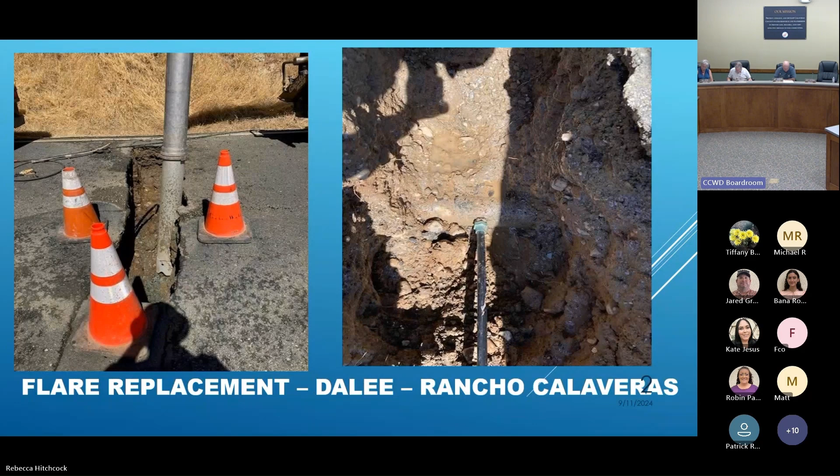So here we are with the flare replacement on Dalee. These come up when the service lines are replaced, oftentimes it's the result of the failing flare on the water main. In the image on the right you can see the water main is partially exposed with the flare connected, and the great work the utility crew is doing, you can see the service pulled out of the ground with multiple repair clamps on it.

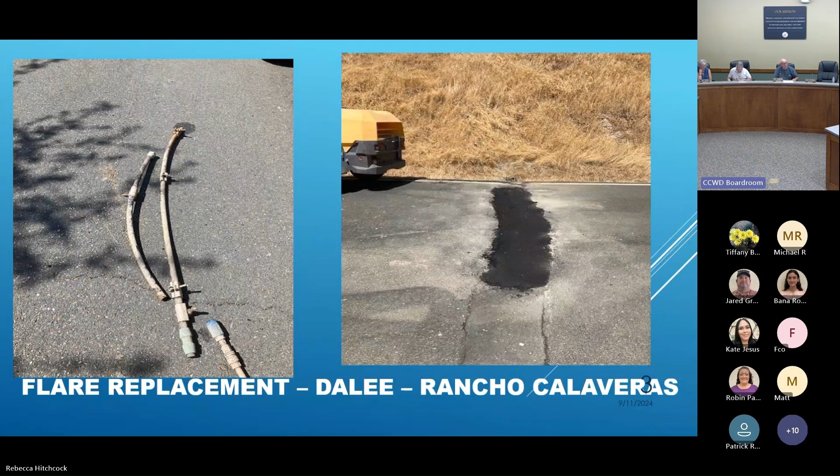With 37 service lines over the last year, we're still in the noise phase of kind of what are we looking at in terms of failure. We have just too many right now, and so we need to get ahead of that. That's part of the good work our utility crew does.

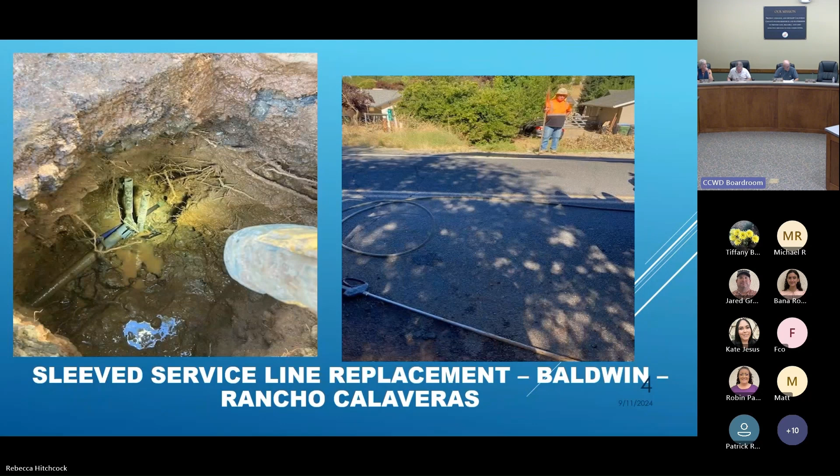This was an interesting one: service line on Baldwin that was sleeved in a piece of plastic that developed a leak. So our folks replaced the entire service line, and you can see it sitting in the conduit there in the image on the right and the left.

What's really interesting is the poly developed this blistering, and we think it could be from the heat sitting inside that piece of conduit and getting hot. Our guys out in the field have never seen it before, it's a really interesting one. That particular material it's made out of, do we have a lot of that out in the field?

Yes, we have a ton of it. Most of the service lines in this service area, actually all of our service areas, are made out of polyethylene. We've seen it flake off, almost like if you can imagine a corn flake coming off the poly, but not bubbling like that. At least these folks have not seen that.

Is that something that could cause a break? I would definitely think it would have an impact on the integrity of the service line over time. I have a piece of it in my office, actually I was going to bring it but I forgot.

So you can see the inside of the line, and it doesn't look like that? It's not that. So I would say over time, I'm sure, but in this case it wasn't the result of this. How long had this one been in the ground? I mean judging, I would say for quite some time, perhaps 20 years, but that's just a guess at this point.

Could it have been damaged like that in the beginning and then they sleeved it because it was damaged? Good point, could happen. Could happen.

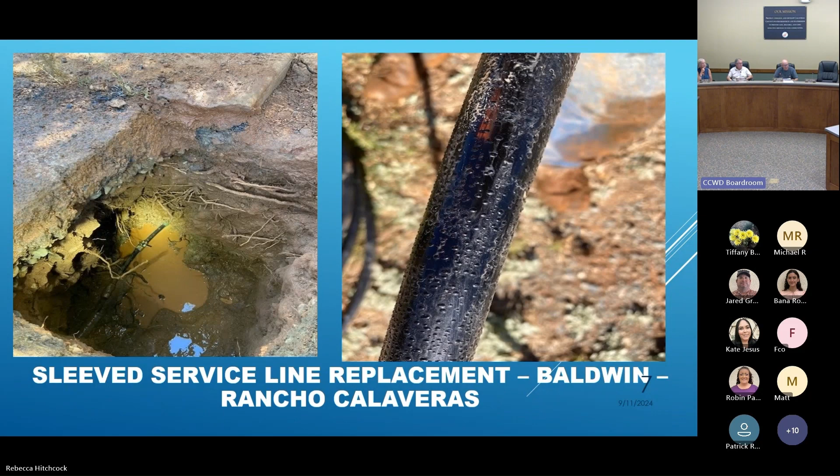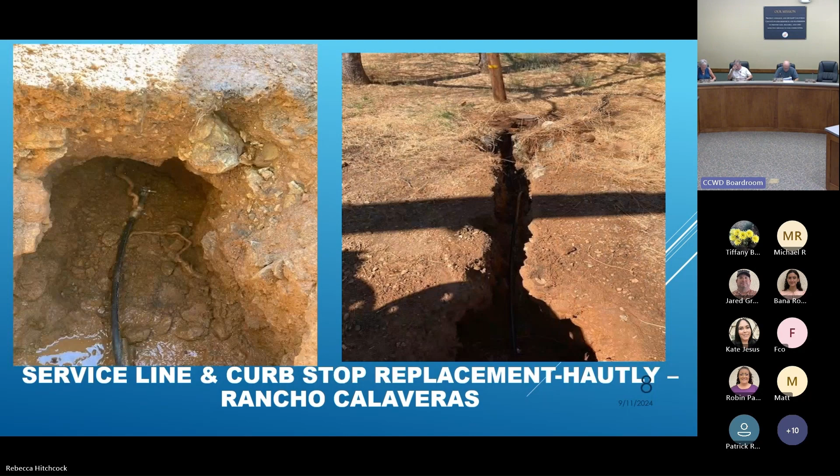So, more of the same: service line and curb stop replacement along Hautly. Can't say enough great things about the work our folks do.

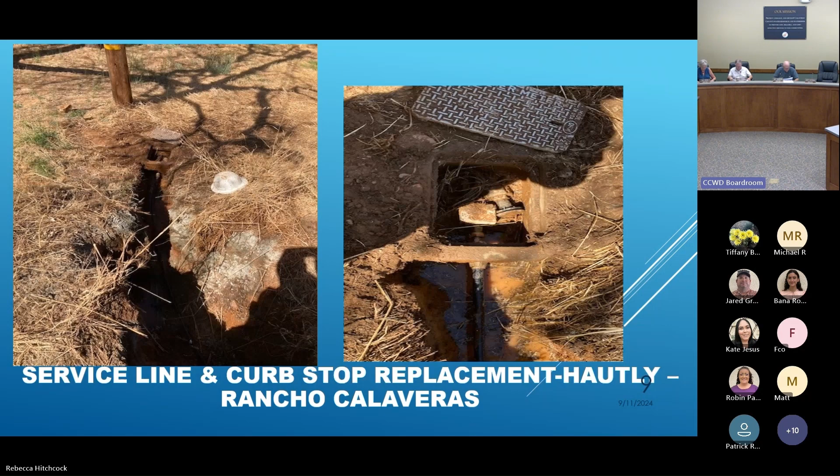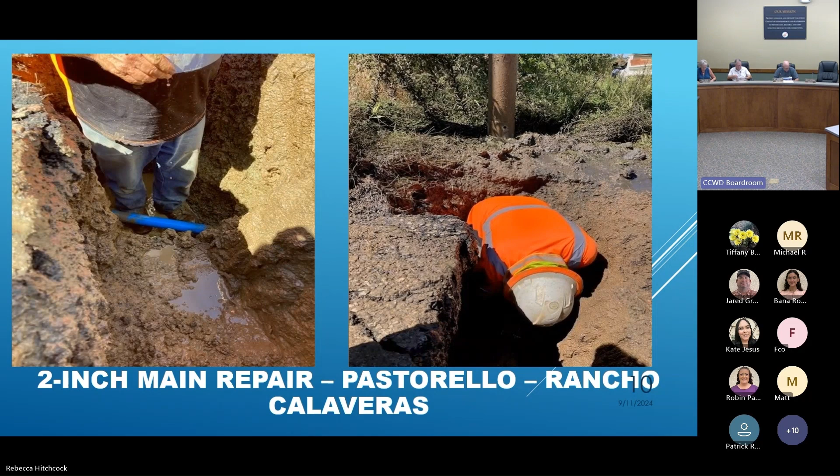2-inch main repair on Pastorello. This is the infamous Bluebell that our folks got in there and repaired during the month of August. You can see the full circle repair clamp on that 2-inch.

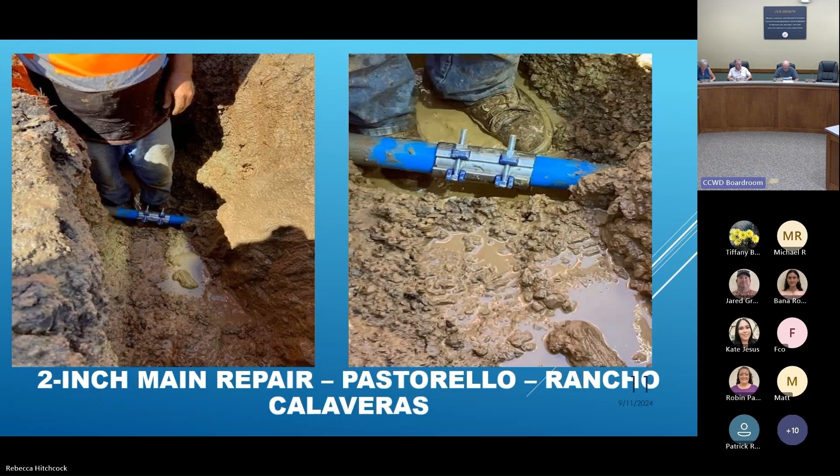Hydrant repair. So we had conversations last month with the fire protection groups. We did an after action review of the Arrow Fire, and talked about how the district works with local fire departments to ensure the integrity of fire hydrants. This is more of that conversation along Hogan Dam Parkway.

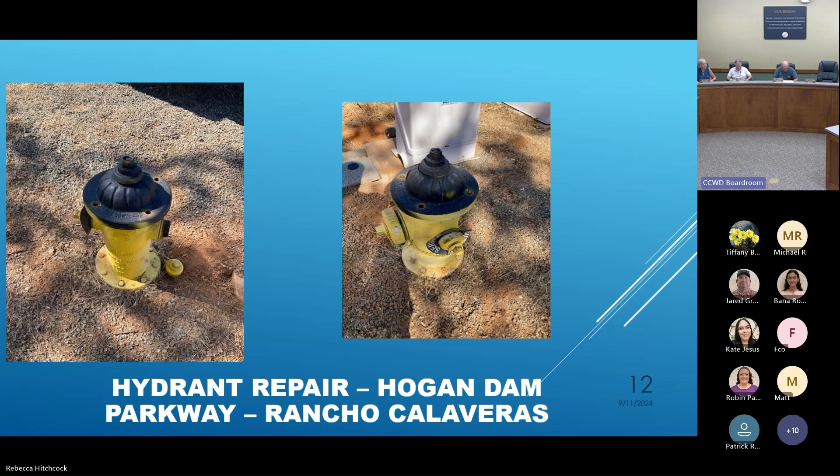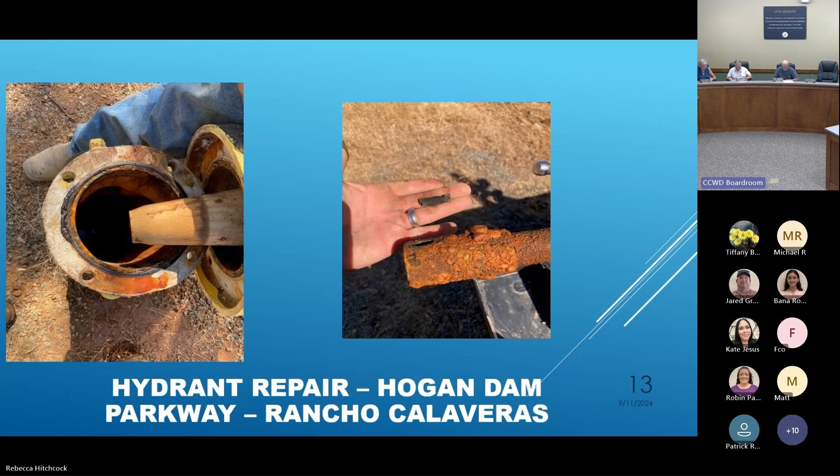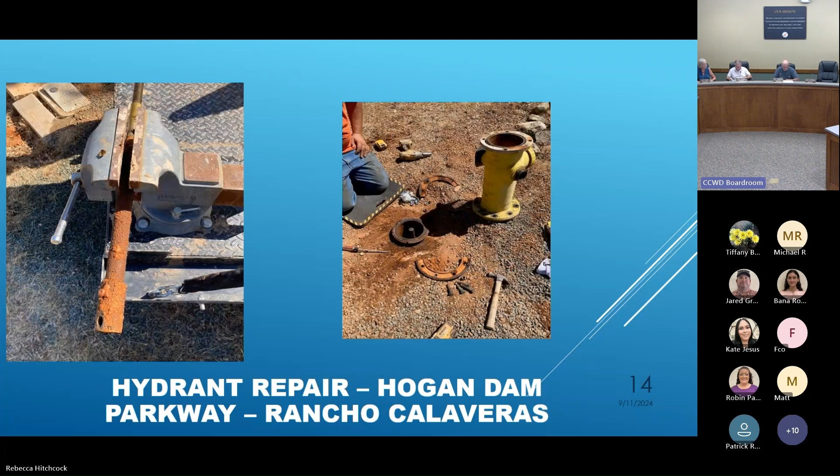We have a stretch of distribution system and this fire hydrant was out of service. Walking through the stem with the bolt at the base, you can see it had just broken off in the image on the right. So our folks go in and take repair components and replace the failed components and rebuild the fire hydrant. You can see the cleaning of the stem in the image on the left, getting off the corrosion, and on the right, the breakaway flange being replaced, the body of the hydrant being put back after everything is cleaned and the breakable parts are rehabilitated.

Can't say enough great things about the work our folks do.

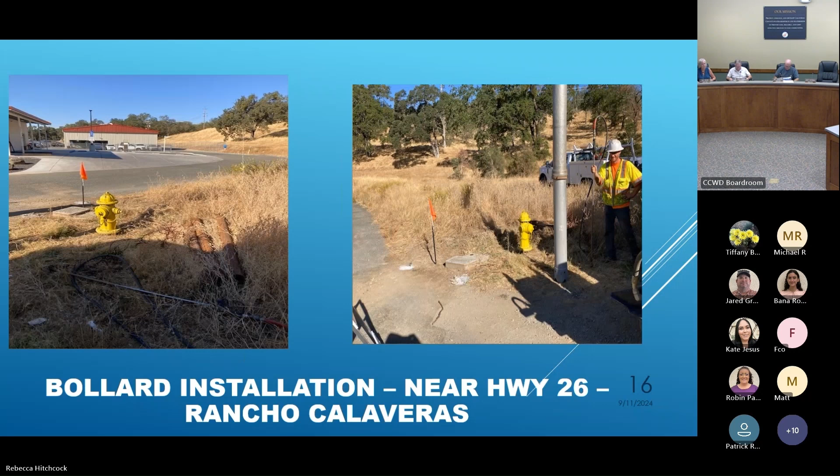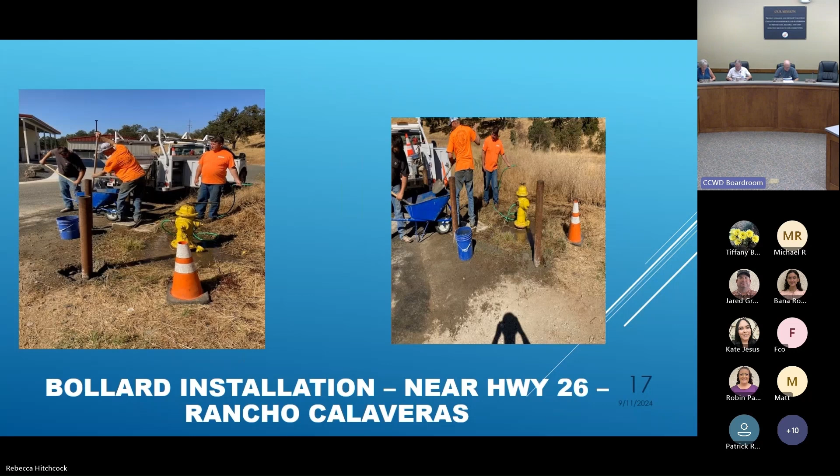This is an interesting one. We have some meter boxes that are just continually getting damaged from vehicle traffic. So sometimes we'll install bollards to protect the meters, and that's what we did here. The distribution team poured steel pipe filled with concrete in front of, in this case, a fire hydrant, and then painted them safety yellow to keep our infrastructure, and actually there's a meter, protected.

There were simply so many service line leaks, and the water would travel from those leaks into this area along Dunn Road. So anytime we would expose this main and try to find where this water main leak was, we would just have water coming in from all directions and really unrecognizable. So there was no ability to really define where the leak was coming from.

The utility crew last year replaced all the service lines along Dunn Road, and the county addressed some stormwater along Dunn Road, and we still had water. So in August, the construction crew worked with the distribution crew, and Pat Burkhart, our construction maintenance manager, was actually out in the ditch working with the guys. They found this leak that has been leaking for approximately 15 to 18 years.

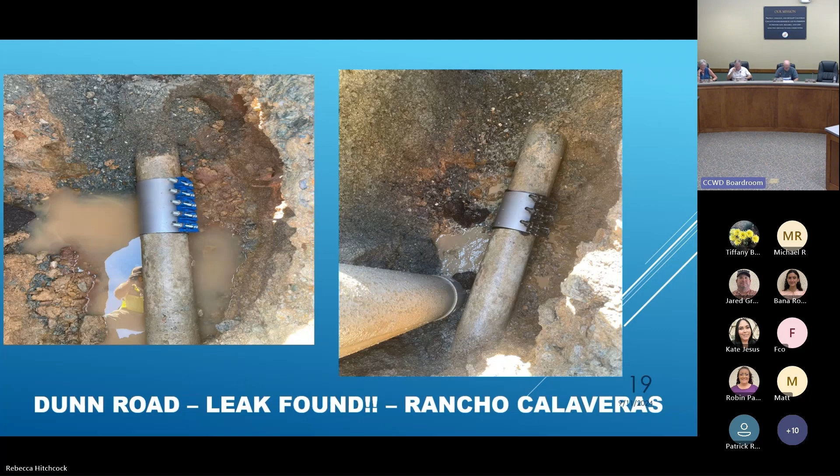And that's this one, see this picture. So it's been repaired. In the image on the right, the black rubber beneath the full circle repair clamp is simply just blown out. So there was a repair at some point in time, and that rubber had just blown out over time, and it was weeping and causing a leak. Hats off to the guys for finding that and fixing it. That one's a good one.

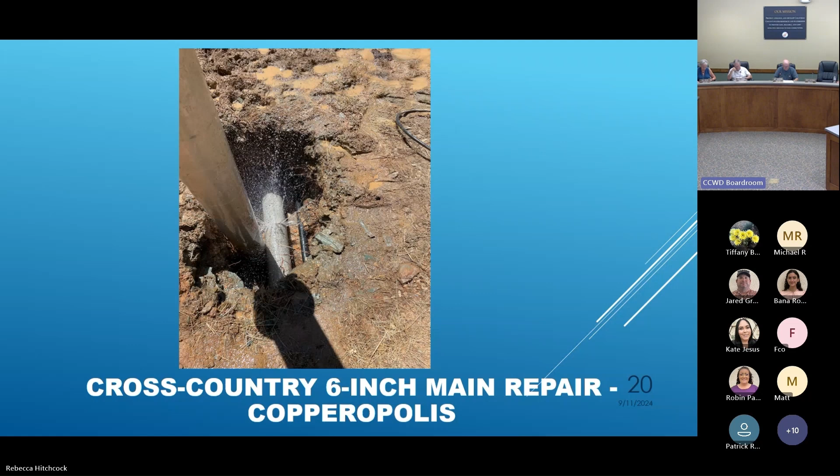Here's one in copper. So AC mains, oftentimes in the dry weather, do what's called shear breaks. The main will just literally break in a perfect circle or ring around the main, and that's what we have here. Those are repaired with a full circle clamp. This is a cross-country line that feeds the Reed's Turnpike pump station, so a really critical line that needed to be repaired after hours. It was ID'd kind of late, and the folks out in the copper distribution crew did a great job getting after it and getting it fixed.

Here's one in West Point. So this is a 2-inch raw line.

Right at the base of the Bummerville Reservoir Dam face, there was a significant amount of water coming out of the dam in front of it, which, as you can imagine, can freak everybody out pretty quickly.

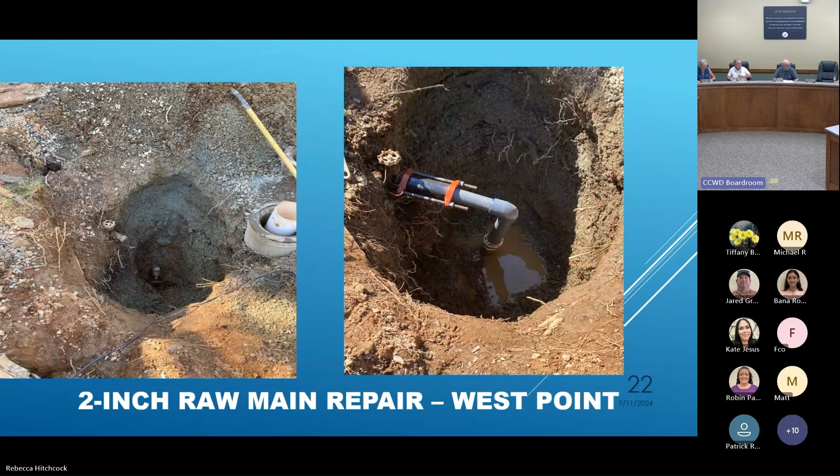Doug did a great job up in West Point diving in and understanding what was actually going on, and it turned out to be a valve. You can see the brass kind of just falling apart in the image on the left. He was able to get in with the operator, Scott Grutzmacher, and they replaced that failed valve and piping, installed a new valve and new piping, and reestablished the G5 lids on the line. Hats off to them for knocking that one out.

If you could go back to the prior slide, there's the 2-inch raw main right there. There's an orange tool there, looks like a jackhammer - is it battery powered? Yeah, looks like a battery powered Sawzall. But is that a little jackhammer, cutting the pipes? Well, it's a little spade. Oh, he had one of those small jackhammers - yeah, a little battery powered jackhammer with a little spade bit on it. That's what it looked like to me.

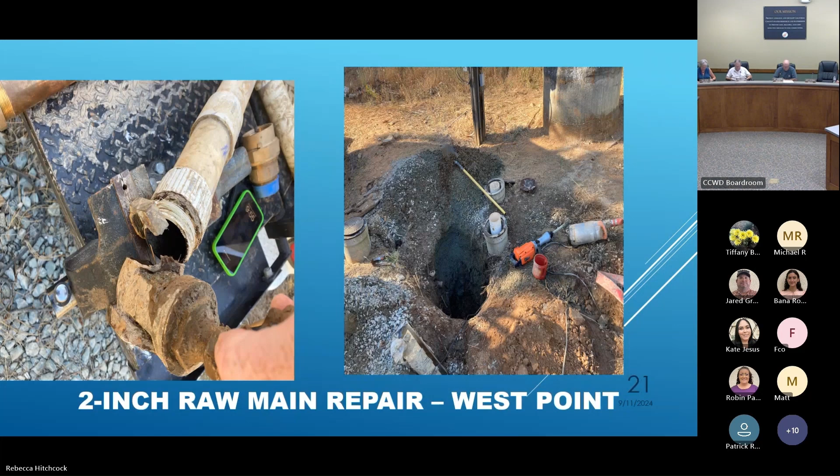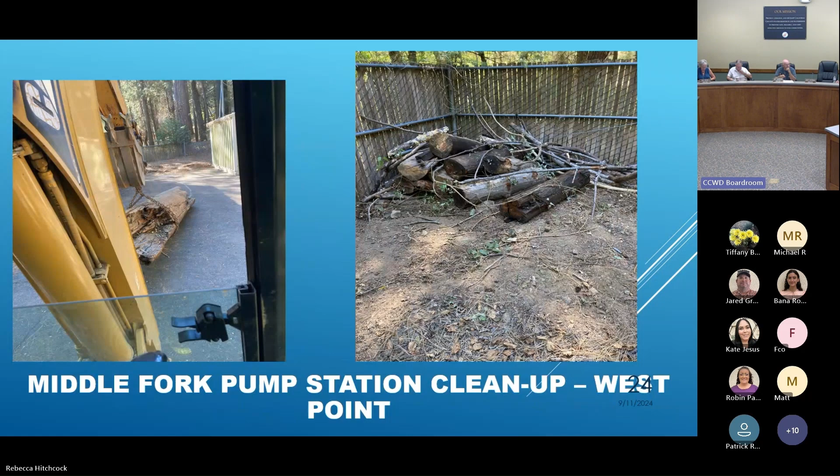Middle Fork Pump Station - as you all know, Middle Fork is a secondary source of supply for the West Point Water Treatment Facility. Over the past few years, we've had a significant amount of debris buildup down at the pump station. The treatment and distribution crews worked closely with our facilities maintenance folks, and we were able to pull out all the snags and debris stuck in front of the intake there on the Middle Fork. As you can see, it's quite a pile.

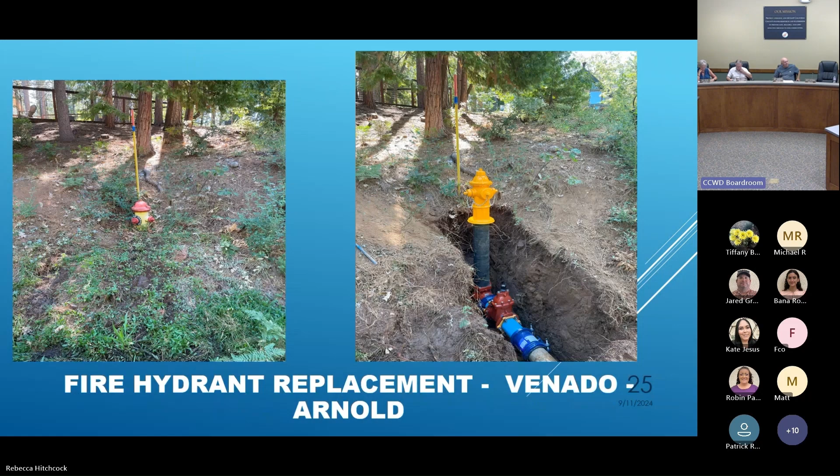Moving up the hill to Arnold, reflecting back on the relationship with the fire protection districts - this one's interesting. In the image on the left, you can see the hydrant on Venado partially buried; that was even brought up in the conversation about fire hydrant O&M. This was a replaced fire hydrant. You can see the valve and the hydrant in the image on the right with the exposed ditch there. Hats off to the construction crew for the great work, taking a hydrant that was partially buried in the bushes and putting a concrete apron around it with a valve.

Look how beautiful, much easier to operate, and it's super helpful. How long did it take them to drill that hole - is that a couple day effort right there? That's a 1-day effort for the whole shoot match. They took the backhoe and excavated.

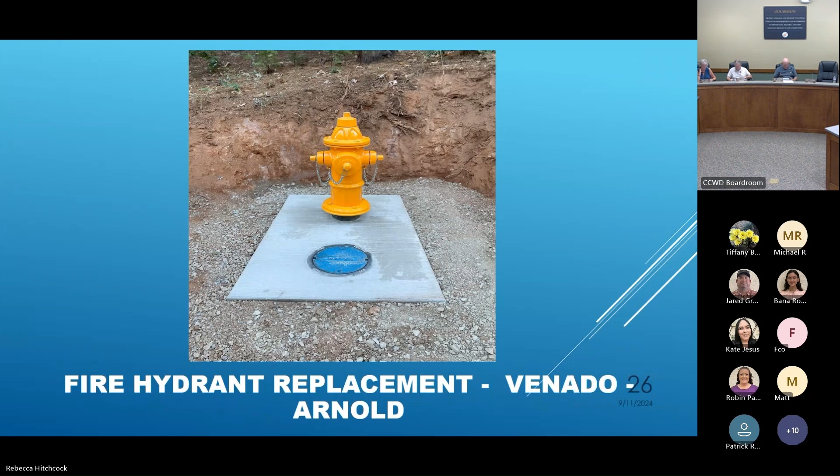What kind of inventory do you have on PRVs? We do - that's a great question, because in the past couple of years we've budgeted to have replacement PRVs installed. Oftentimes what will happen is we'll have a 6-inch or a 4-inch PRV say in the White Pines dam or in the shop here at the yard, and then that's usually it.

So if we're going to have a large 8-inch PRV with a bypass, we're going to order that through capital outlay through the budget process. And once we receive it, we're going to make a plan to install it.

Almost as if you were on cue, Director Underhill. That was nothing. The Dorrington Pump Station PRV replacement was one thing that the construction and distribution crew recently completed in the month of August. They did a fabulous job.

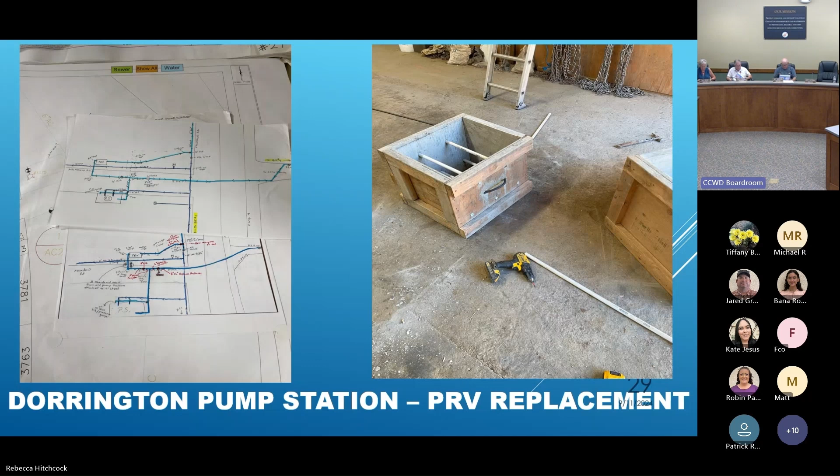That's what you see in the image on the left - Joe does a fabulous job, works with Roger and the rest of Pat's teams to develop a game plan. And then they understand that we're going to need to put kickers on this piping. So the guys build forms for kickers so that when they do install the piping, they have forms ready to go. That's what these are.

And then taking it even a step further, there's the conversation with Kelly G and customer service about notification, letting everybody know we're going to complete this work effort and there's going to be a water outage. And let's also put up signage to notify everybody. Signage, kind of just letting everybody know - let's keep that signage up for a couple of weeks, let everyone start to understand okay, this is actually going to happen. And then let's replace that good old redwood box that has a really critical pressure reducing valve in it next to a pump station that's probably been there for, I don't know, 50 years.

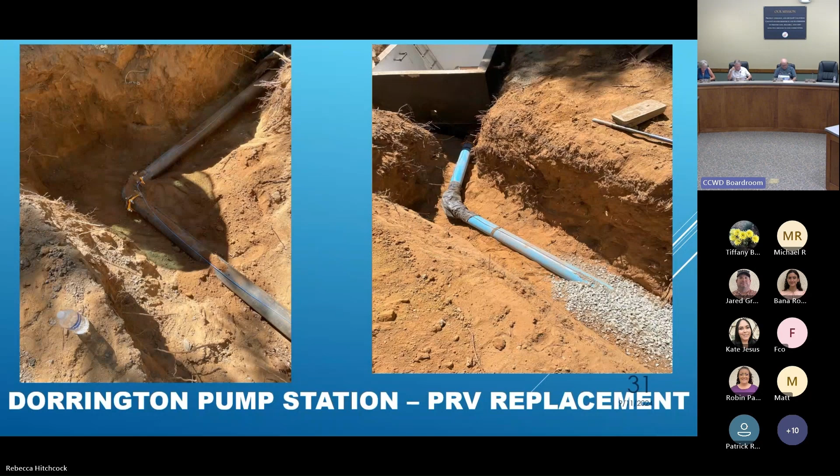And then the work happens, and you can see the piping, inlet and outlet piping, being plumbed. In the image here on the right on the screen, you can just see the PRV up at the top. And then here's one of the kickers that was fabricated in the shop - the guys were able to put it in. And then you can see the crane, which we have to schedule, setting the pressure reducing valve vault.

So this is a given, I'm sure. So because that kicker, that cement block, it's keeping that turn of water from releasing or breaking or whatever. That's right, that's right. Cool.

So it just illustrates the consideration that our guys have. They're understanding the hydraulics of what the work is that they're about to do, and they're preparing to address any deficiencies that might happen. While that's - that's why we have such good staff out there. Yeah, it's great stuff, it's just really great.

New valve installations. So along with the considerations for installation of new construction come the considerations of how do we optimize our system and make it better. So some months ago, we had a water main break that resulted in Snowshoe Springs HOA, which receives purchased wholesale water directly from us, having to reduce their use, and some folks were out of water. Our folks in the distribution crew were able to look at a way to provide a redundant source of supply.

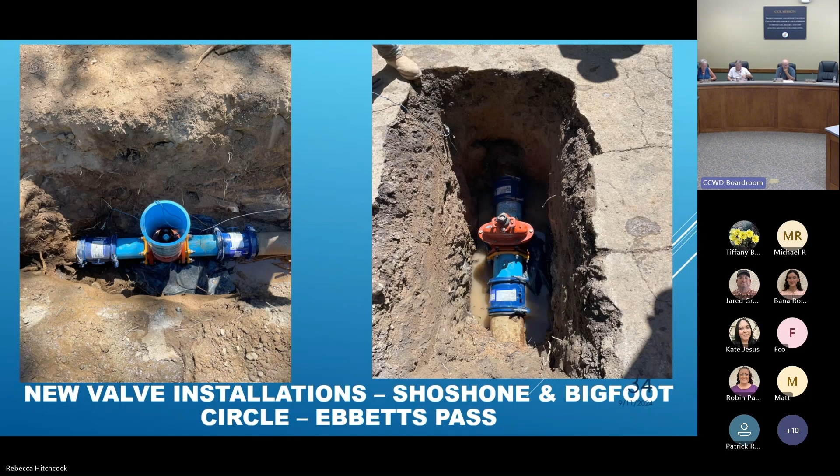Like if we install a valve right here, if we have an issue over here on this part of our system, we can actually keep them in water by sending water this way. So that's part of what this work effort was - a way to optimize our system and provide better customer service to our friends, neighbors, and customers. So that work always continues, as does the work with the CAL FIRE crew. Those folks do great work for us.

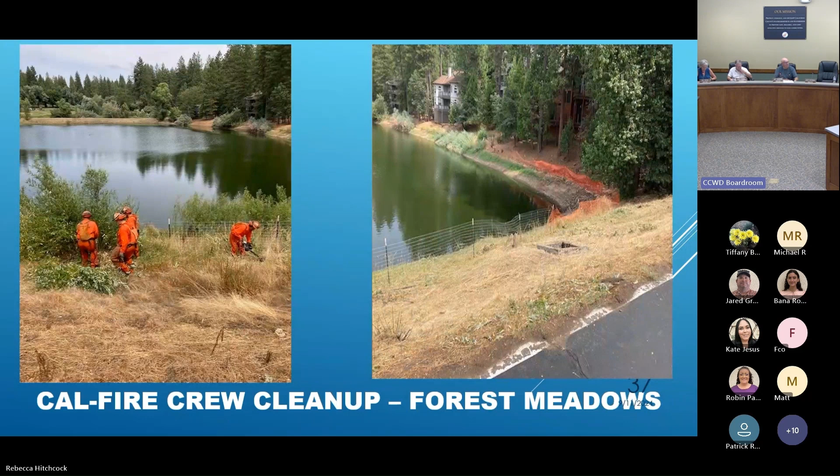Here's some images of the work they did recently at the White Pines dam and on the approach to White Pines, just making sure our facilities are safe and the defensible space is intact. The good old Forest Meadows Pond, doing cleaning work around that. They come down like a swarm of bees and clean it all up. Hats off to Ron, Rose, and Eric Martinez, who work with the CAL FIRE crews, and hats off to the crews for all the good work they've done.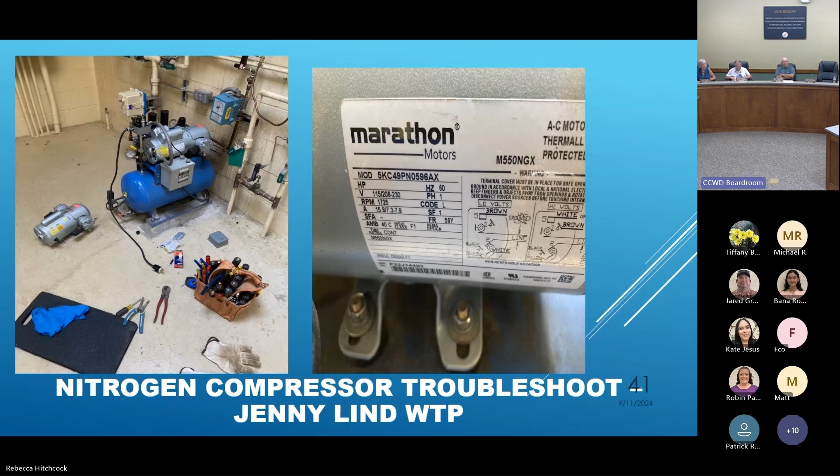So here we are — you'd call this a nitrogen compressor, but it's actually an air compressor. At an ozone generator, you're siphoning off the nitrogen that exists naturally in the air, but using an air compressor to do so. So here they are troubleshooting and repairing the air compressor.

Hour meters are critical. We talk about infrastructure and infrastructure age and replacement, so we have hour meters on our pumps and motors. Our operators document the hours and will adjust the operations of pumps based on how old or how much operation each of the pumps has. It's really important that those hour meters work.

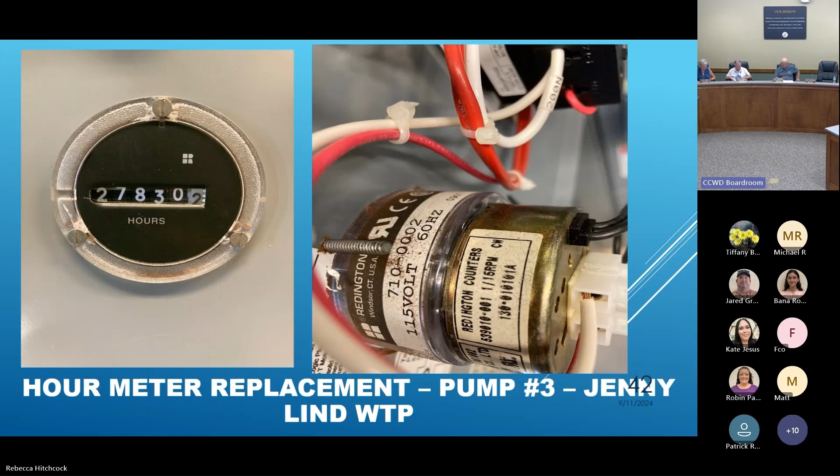What's the life expectancy of a pump in hours? Oh, you can get 8 to 10,000 hours out of a pump easily if you maintain it properly. I would say probably double that, so about 10 years of pump operation.

Flow meter reads are critical for all of our facilities. So when you have an erratic flow meter and have to troubleshoot that, you call the electricians out and they do a great job of taking care of business there.

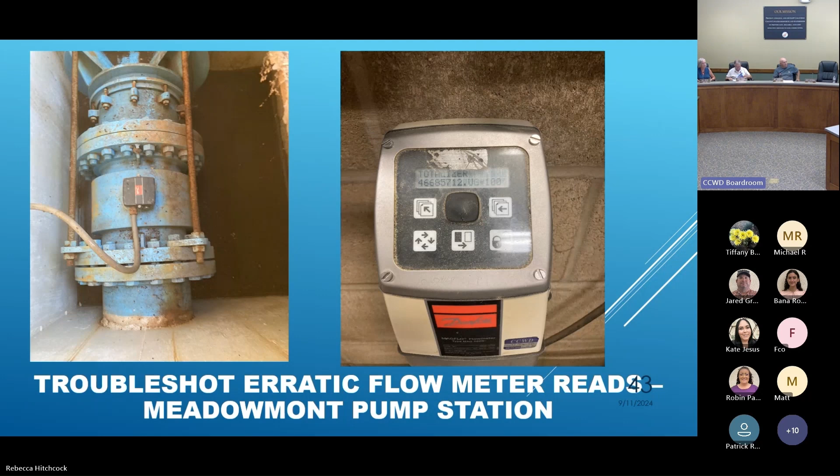Hats off to Doug Turner and Scott Grutzmacher up in West Point. They do a great job of meeting our needs up there.

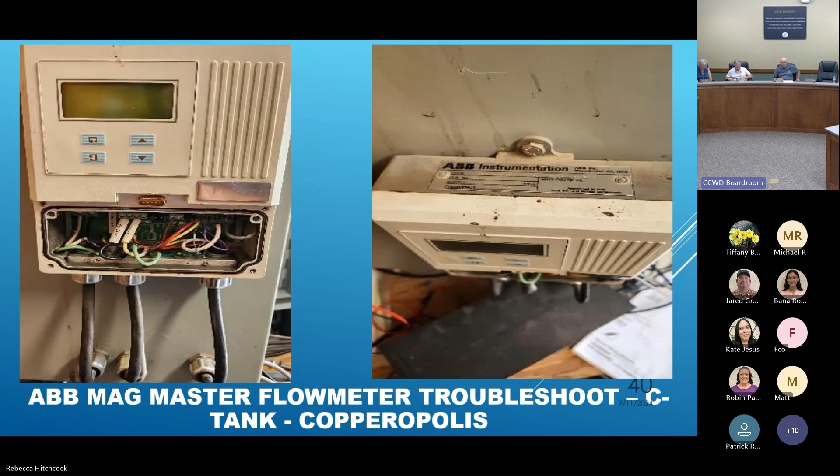Awesome. Yeah Damon, could you toggle back to slide 27? It's an old PRV abandonment.

Oh, right there — I noticed this when you had it up before, that there's a lot of dirt, rocks, and debris in the bottom of that, whether that's the old redwood tank or a concrete tank. Is that coming up through gopher activity or something in the bottom of the vault?

I'm not sure about this particular vault, but some of the vaults were at a depth that at some point in the past the district added rock to the bottom of some of these PRVs to make them shallower. I don't know if you guys recall — that's off of it, it was vertical. That used to be a redwood box. We had to replace that several years ago. It was attached to the 3A, so it comes in vertical.

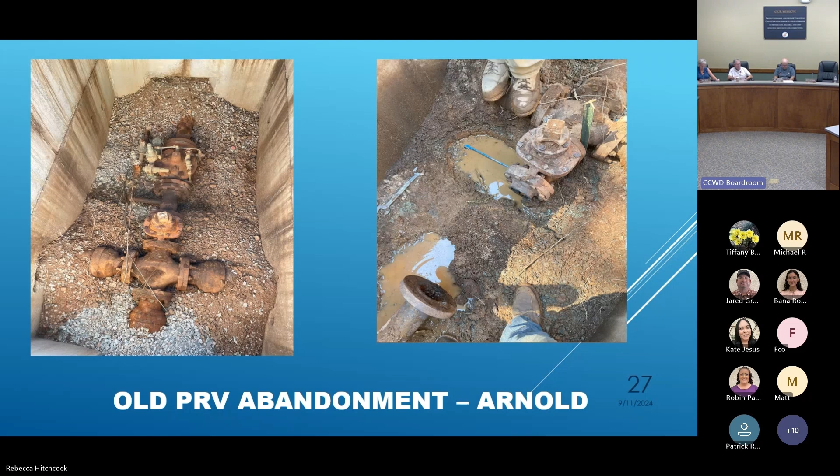So I would just say that's the floor then — that's the dirt on the floor for that particular PRV vault. But it looks like the dirt has come up to the midpoint of the piping or something. My question was, with these new vaults you're putting in, do you ever put a very poor cement mixture in the bottom just to keep rodents and stuff from coming out?

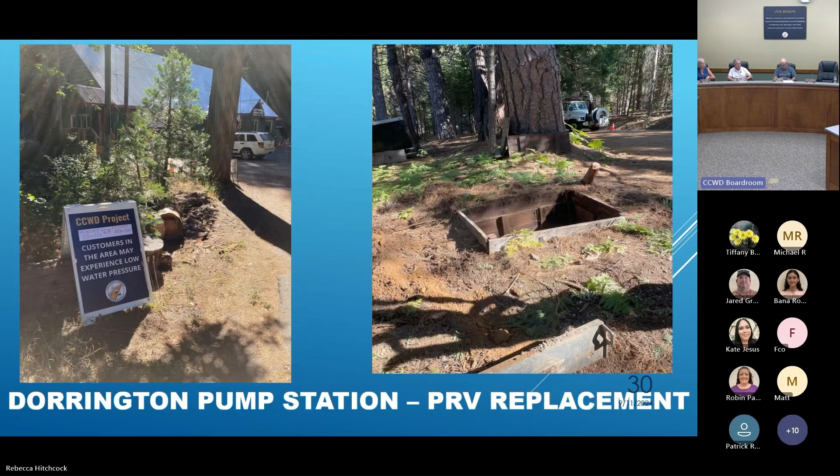Yes, all manner of the above — I was going to see if we can see it here in this one, it's kind of hard to see. Some of them have floors, some of them you'll pour the floor. A lot of the work the guys have been doing up in the past is, if there isn't a drain in the floor — and that's often why there wouldn't be a floor, so water that gets in can naturally perk into the ground — they go out with a hole saw and drill a hole to make a port to evacuate any water that shows up in the vault, from failure of piping or whatnot. But we have all manner of the above.

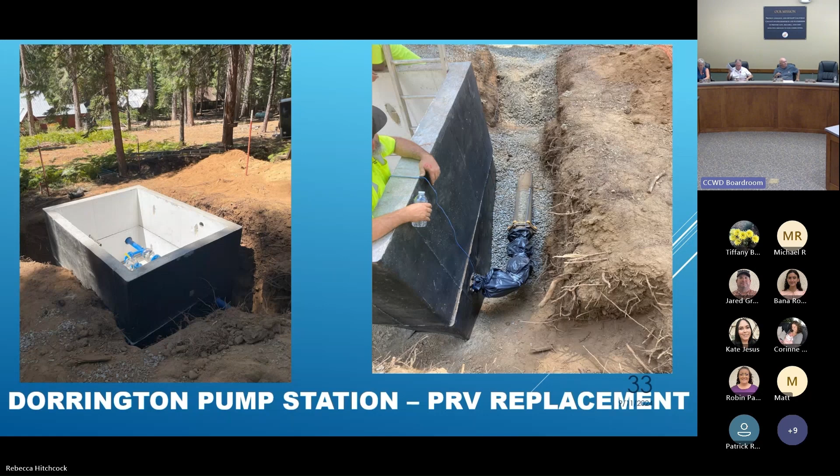Good pictures, like them. Thank you. I just had one question.

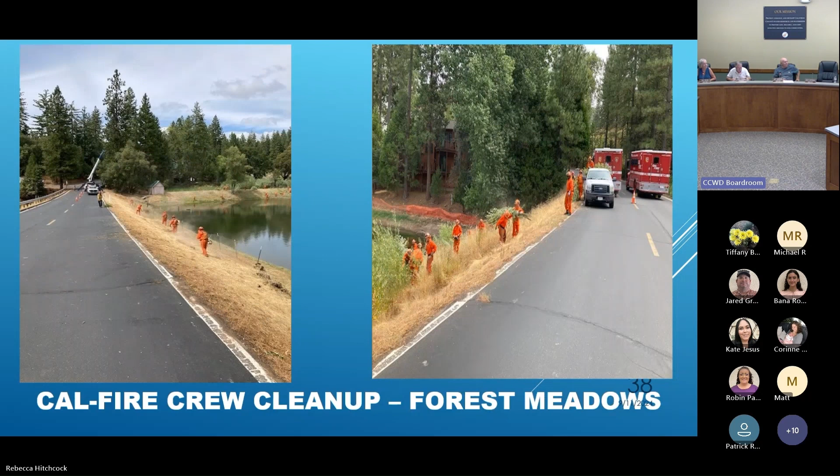I know we've been talking about this lead thing, and you did have a notation that you participated in to review the plan for lead service line inventory. So, there is a plan? Yeah, the plan is in effect and it's almost complete. So with the lead service line inventory, if I can just real quick,

all public water utilities in the country are required to complete an inventory for customer-owned service lines and provide an understanding of what it's made out of. Is it lead? Is it galvanized? Is it galvanized and in need of replacement? Is it copper? Is it plastic? Is it PVC? Is it polypropylene?

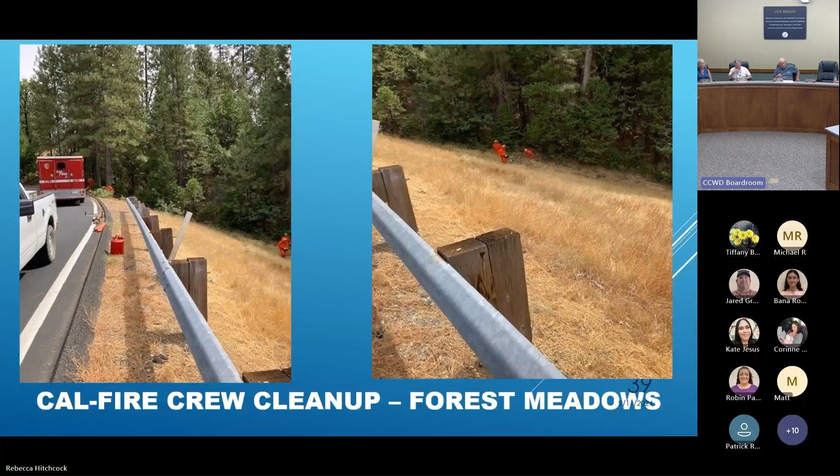And so there's a couple ways that the feds are allowing water districts to do this, and one is by statistical analysis. CCWD presented a plan to the California regulatory bodies who then report to the EPA. That was a statistical analysis. So what we did, rather than look at all 13,000 plus service lines, we looked at a random representation right around a little over 1,000, and based on that assessment, we report out.

So we have until October 16th to complete the work effort, coming up. And we have, as of right now, about 400 left, less than 400. So our crews are doing a fabulous job and they're ahead of schedule.

Because I know we had talked about how extensive that was going to be, and you're almost through, you guys have done wonders. Yeah, and I've gotta acknowledge

I will tell you that a lot of utilities have not even started, and a lot of larger cities have not even started. And in some ways rightly so, because a lot of folks in California were continuing to say, hey feds, time out. How are we supposed to tell you what private homeowners' infrastructure is made out of, and how are you going to require that of us? So there's a lot of folks still trying to understand the requirement. And so we were able to look at 1,000 and knock it out. That's a victory for us.